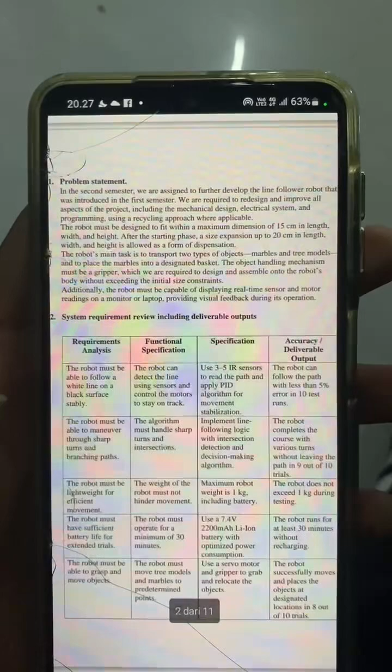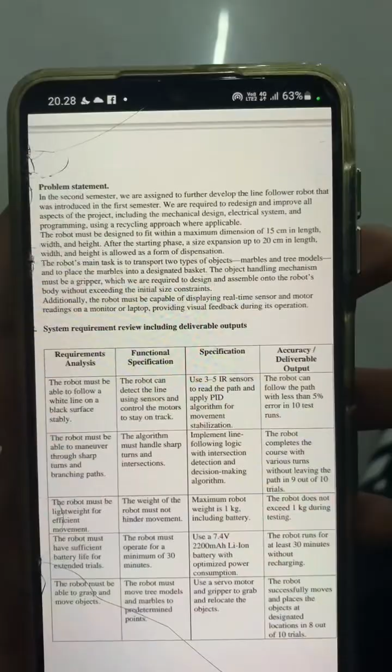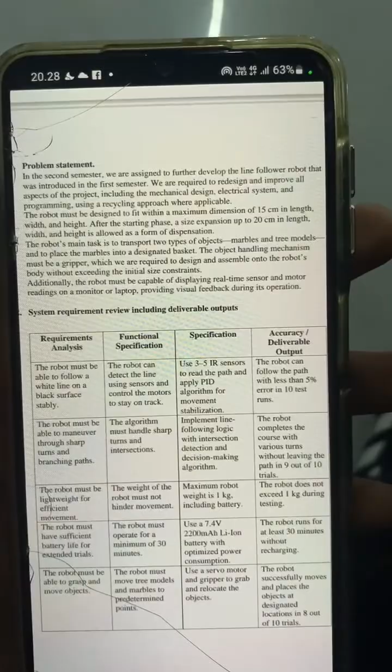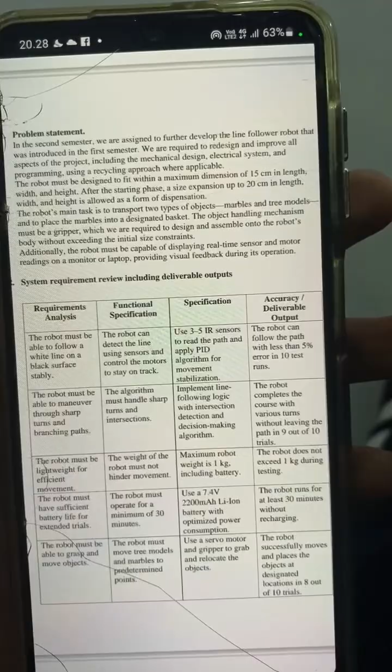Number one, problem statement. In the second semester, we are asked to further develop the line follower robot introduced in the first semester. We are required to redesign and improve all aspects of the project, including the mechanical design, electrical system, and programming, using a recycling approach where applicable. The robot must be designed to fit within a maximum dimension of 15 centimeters in length, width, and height.

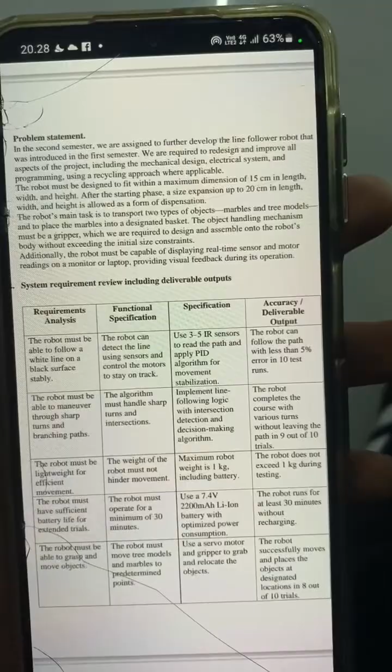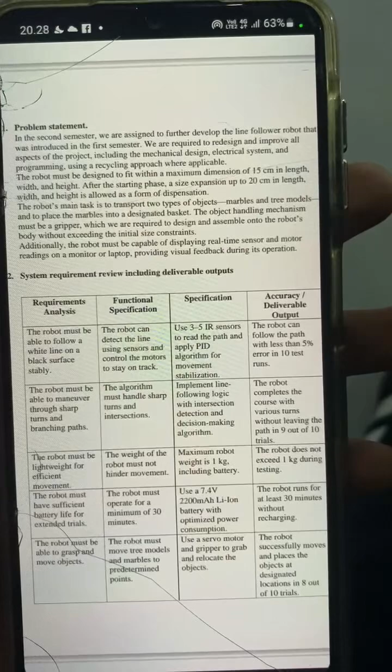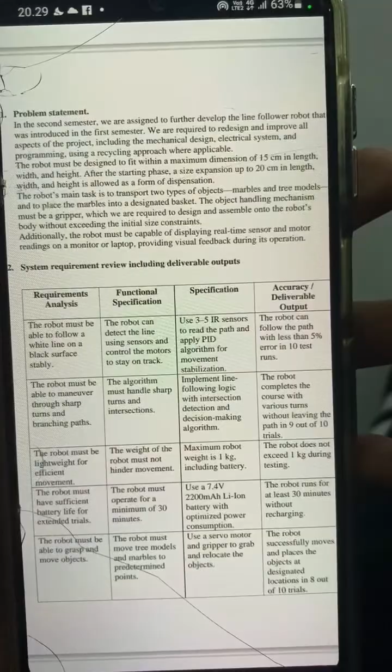After the starting phase, a size expansion up to 20 centimeters in length, width, and height is allowed for the expansion phase. The robot's main task is to transport two types of objects, marbles and tree models, and to place the marbles into a designated basket. The object handling mechanism must include a gripper, which requires design assembly onto the robot body without exceeding the initial size constraints.

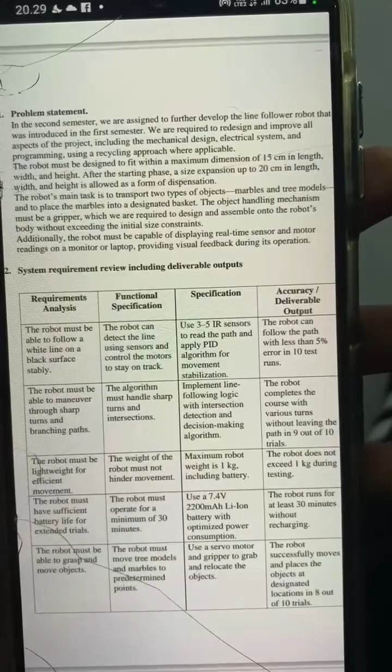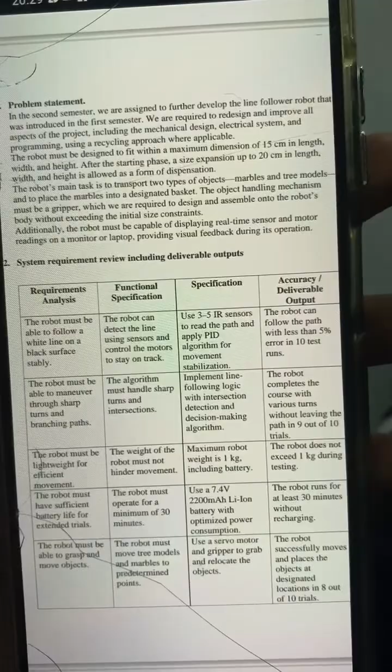Additionally, the robot must be capable of displaying real-time sensor and motor readings on a monitor or laptop, providing visual feedback during its operation. Number two, system requirement review, including deliverable output.

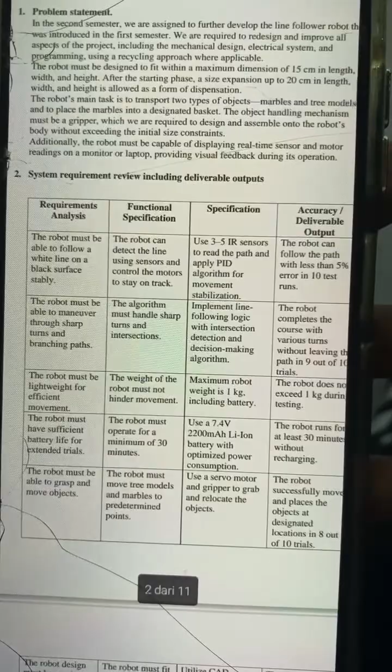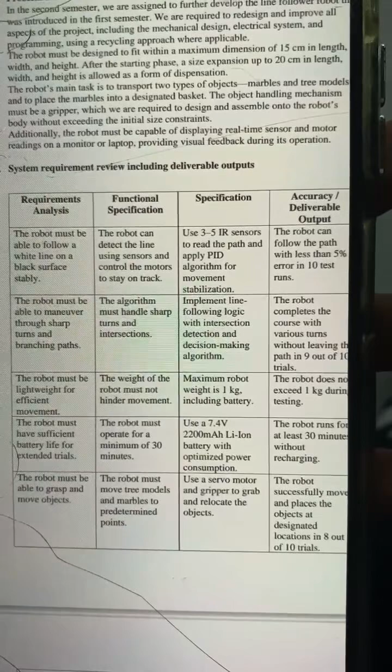Deliverable output and requirements analysis. The robot must be able to follow a white line on a black surface stably, and functional specification.

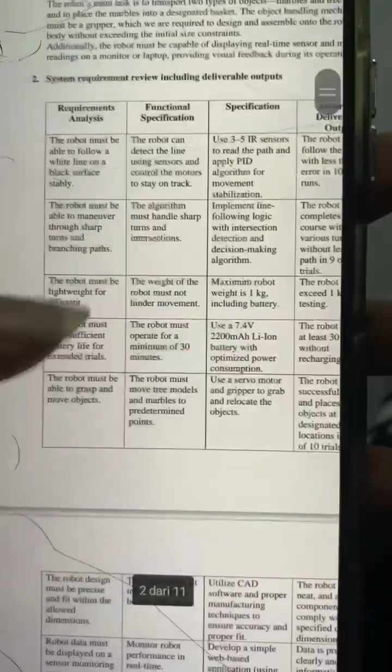Deliverable output. Sorry, too long. Thank you.

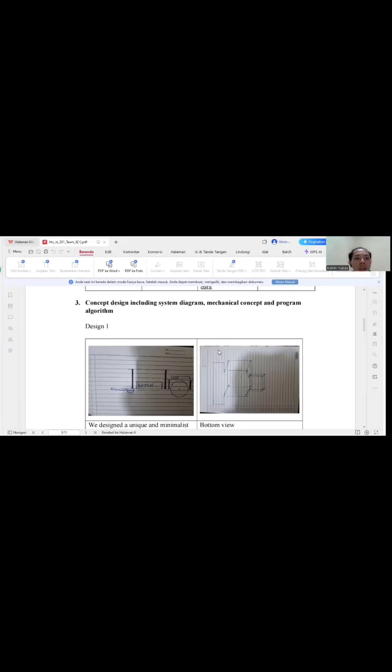Design 1. We designed a unique and minimalist structure to ensure the robot operates at maximum efficiency.

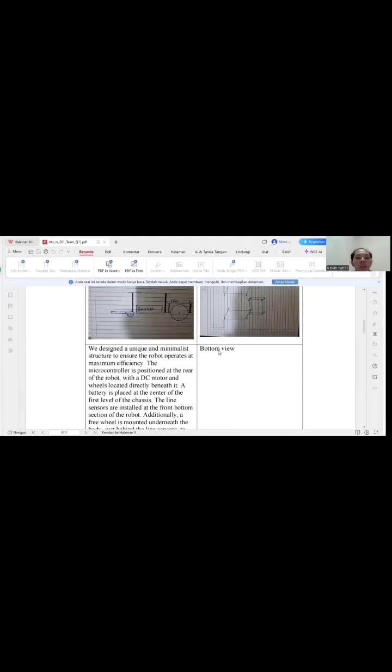The microcontroller is positioned at the rear of the robot, with the DC motor and wheels located directly beneath it. A battery is placed at the center of the first level of the chassis.

The line sensors are installed at the front bottom section of the robot, angled diagonally. A free wheel is mounted underneath the body, positioned near the line sensor to facilitate motor turning movement.

Bottom view. This design is intentionally made to simplify the mechanical process of cutting and assembly.

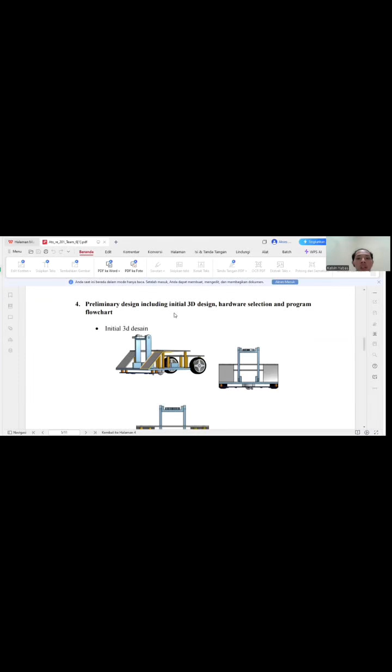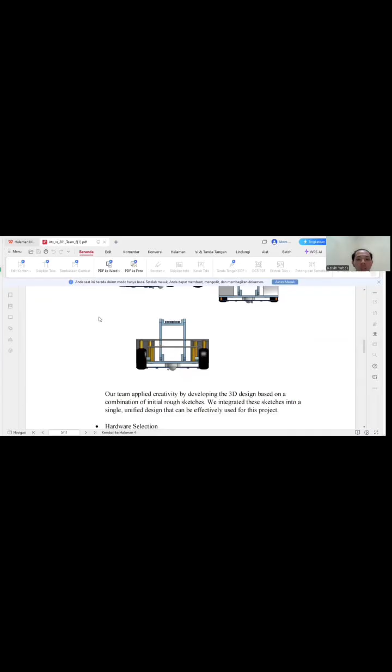Number four, preliminary design, including initial 3D design, hardware selection, and program flowchart. Our team applied creativity in developing the 3D design based on a combination of initial rough sketches.

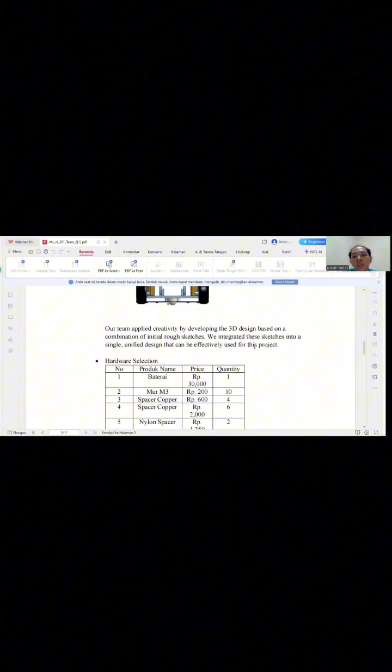We integrated the sketches into a single unified design that can be effectively used for the project. Hardware selection.

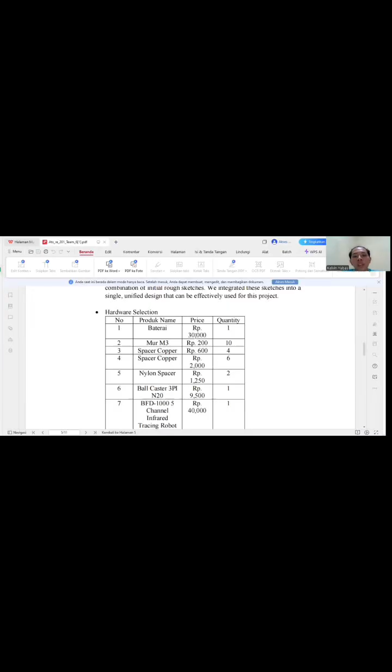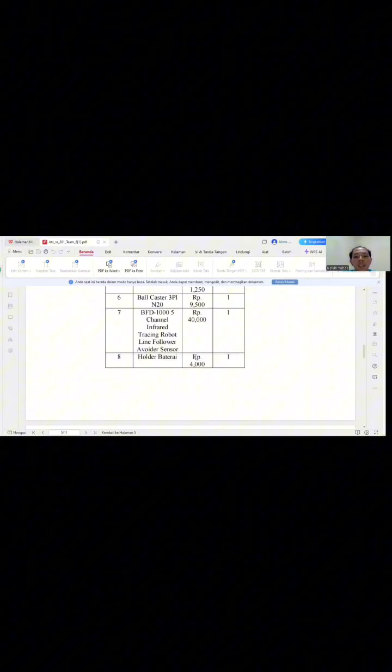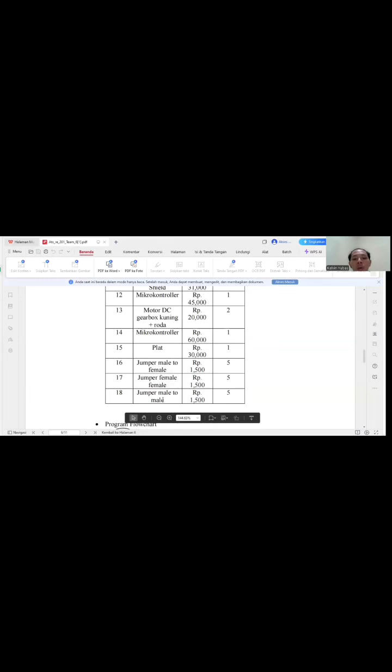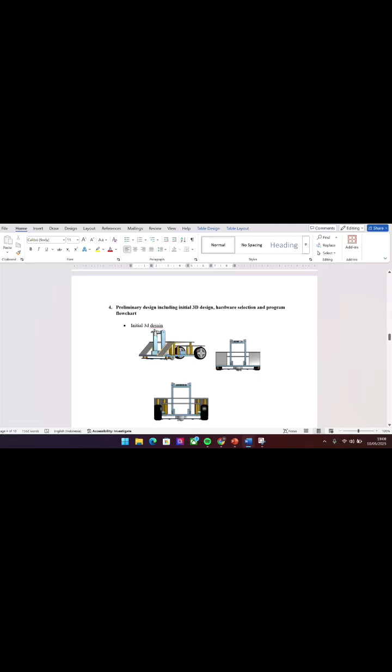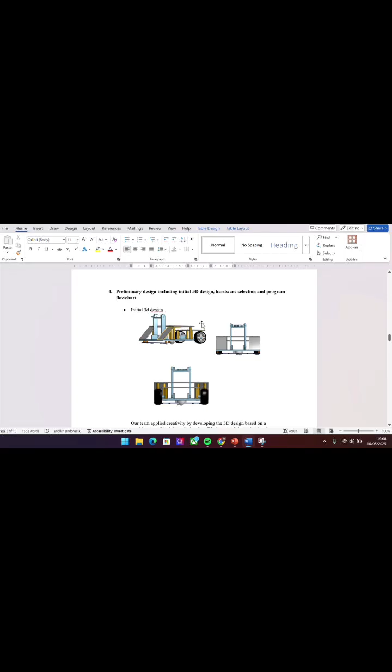Number four, preliminary design, including initial 3D design, hardware selection, and program flowchart. In this preliminary design, the initial 3D design is as follows: the first floor contains the microcontroller and motor driver, with the wheel at the back view, and the DC motor.

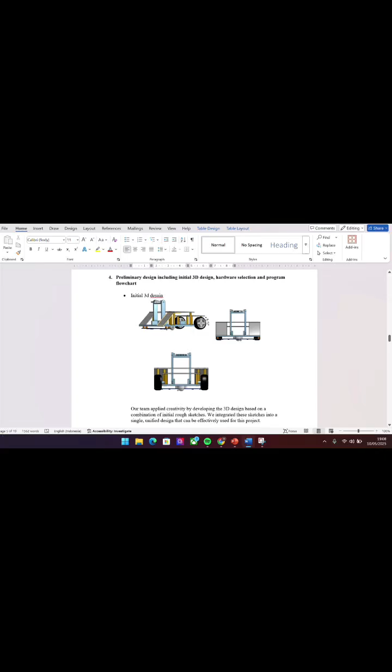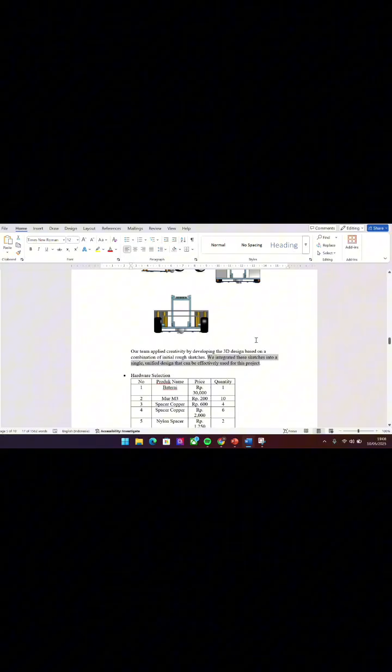Our team applied creativity by developing the 3D design based on a combination of initial rough sketches, and we integrated these sketches into a single unified design that can be effectively used for this project.

Hardware selection, numbered from 1 to 18, as shown.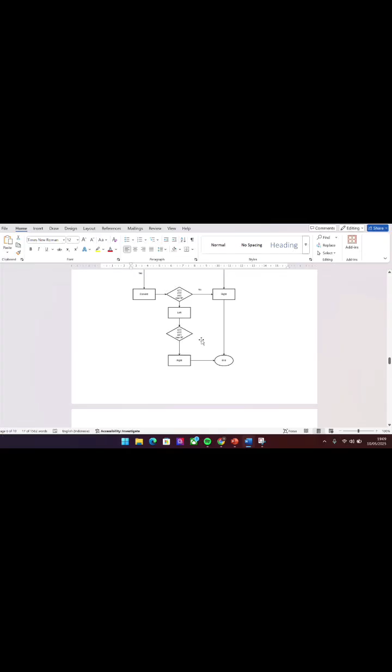Number 5, critical design includes final 3D model, confirm hardware selection, and software algorithm.

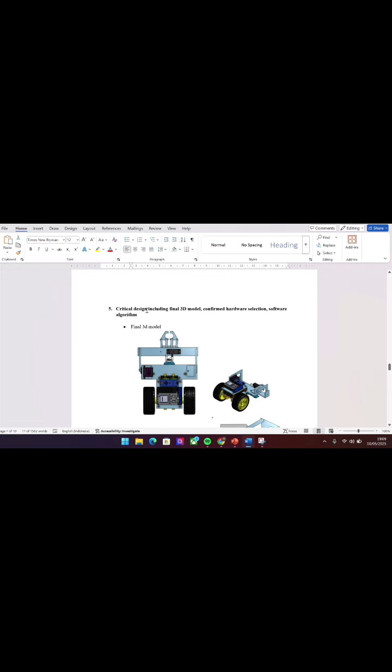The final 3D model, you can see by concept this, and the top view, and the isometric view.

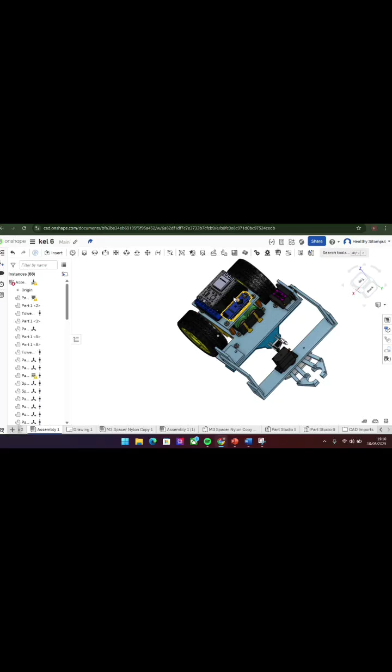In the first floor there is battery and holder battery, servo, and on the second floor there is microcontroller and driver motor. On the bottom side there is DC motor yellow and wheel yellow, freewheel, line sensor, and gripper.

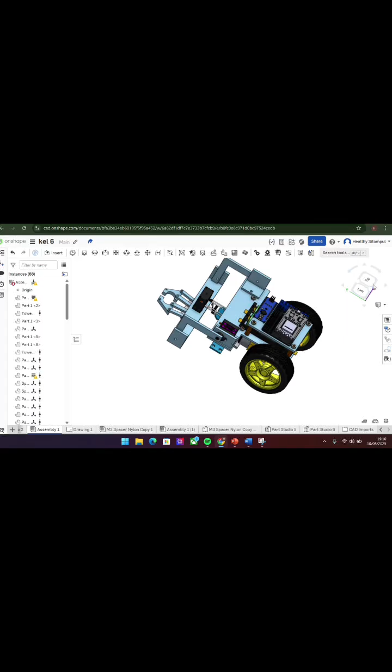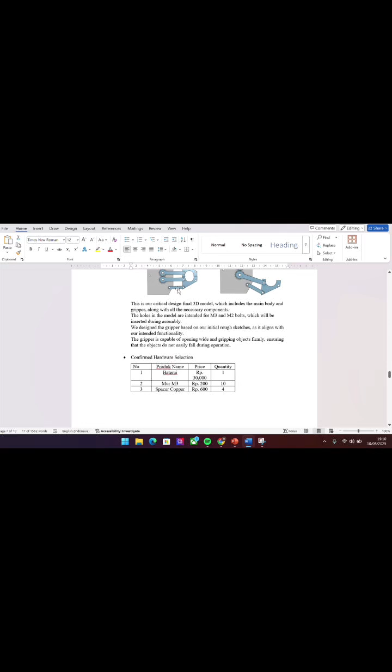You can see the mechanism of my gripper. Okay, thank you. Next to this is our critical design final 3D model, which includes the main body and gripper along with all the necessary components.

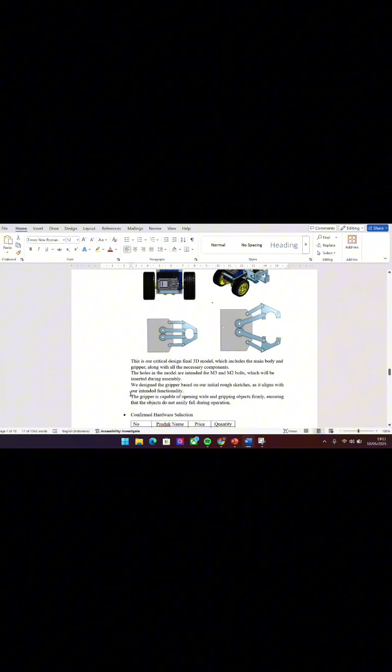The holes in the model are intended for M3 and M2 bolts which will be inserted during assembly. We designed the gripper based on our initial rough sketch as it aligns with our intended functionality. The gripper is capable of opening wide and gripping objects firmly, ensuring that the object does not easily fall during operation.

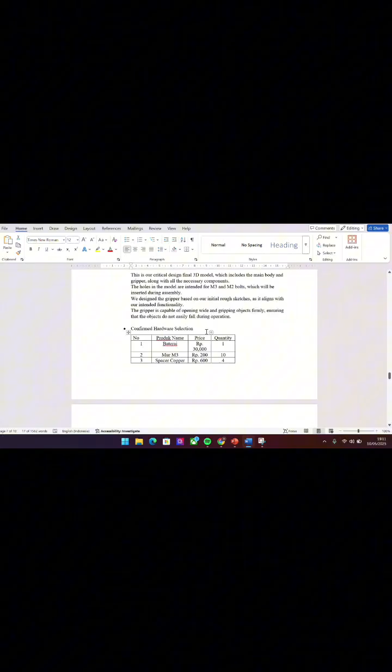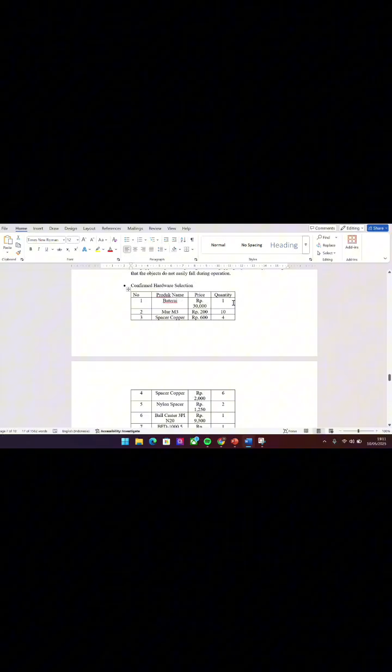Confirm hardware selection. I will read for you, and you can see my table. Number one, battery quantity 1; two, bolt M3 quantity 10; three, spacer copper quantity 4, spacer copper quantity 6, nylon spacer quantity 2.

Caster wheel or freewheel quantity 1, line sensor quantity 1, holder battery quantity 1, servo quantity 2, bolt M3 quantity 20, motor driver shield or NodeMCU quantity 1, ESP8266 quantity 1, DC motor yellow and wheel quantity 2, Arduino Nano quantity 1, acrylic flat quantity 1.

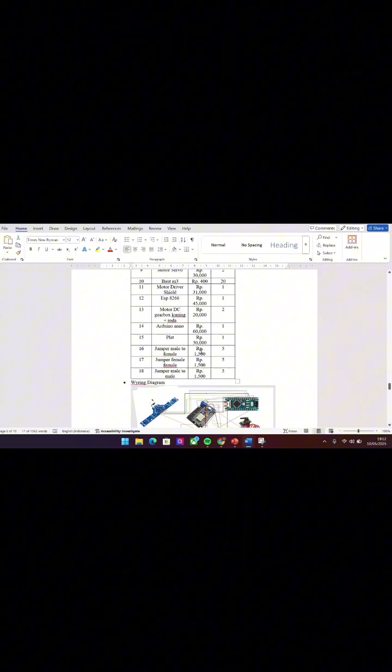Jumper male to female quantity 5, jumper female to female quantity 5, jumper male to male quantity 5.

Next, the wiring diagram. My team used two microcontrollers: a Nano and an ESP8266. You can see the jumper connections.

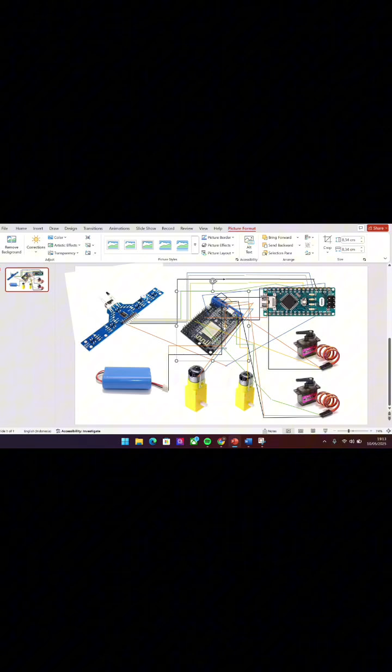Why did my team use the Nano? Because the ESP8266 lacked enough pins for the servo, so we jumpered the servo connection between the ESP8266 and Nano. My team used RX/TX on the ESP to jumper to the Nano.

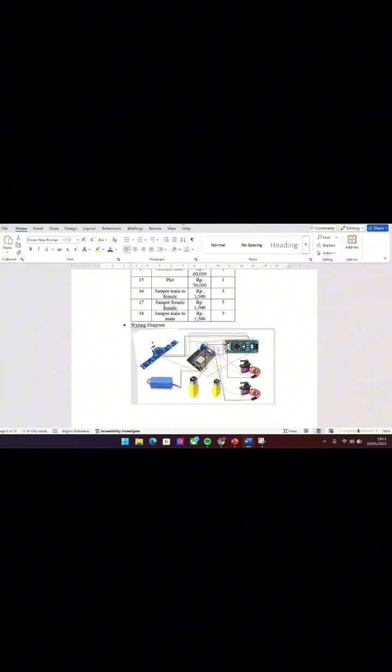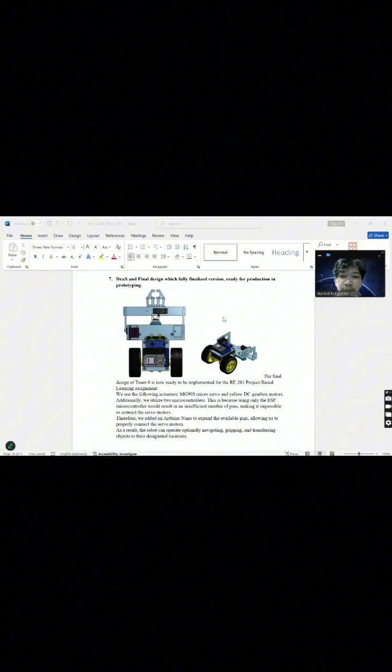Okay, here I will explain about the draft and final design and project timeline. Number 7, draft and final design, with the fully final version ready for production or prototyping.

The final design of Team 6 is now ready to be implemented for the RE 201 Project-Based Learning assignment. We used the following actuators: MG90S micro servo and yellow DC gearbox motors.

Additionally, we used two microcontrollers. This is because using only the ESP microcontroller would result in an insufficient number of pins, making it impossible to connect the servo motors. So we added an Arduino Nano to expand the available pins, allowing us to properly connect the servo motors.

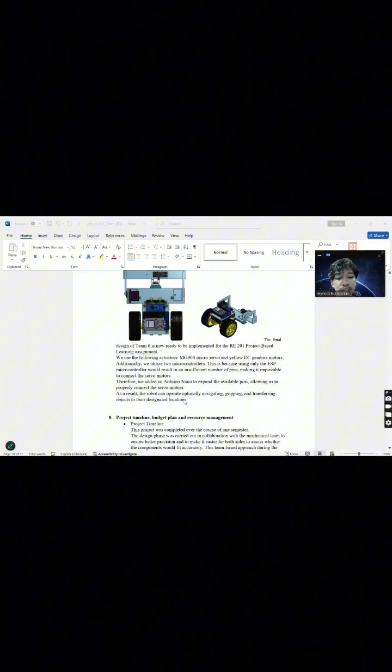As a result, the robot can operate optimally, navigating, gripping, and transferring objects to their designated locations. Next, number 8: project timeline, budget plan, and resource management.

Project timeline: this project was completed over the course of one semester. The design phase was carried out in collaboration with the mechanical team to ensure better precision and to make it easier for both sides to assess whether the components would fit accurately. This team-based approach during the design stage greatly facilitated the process.

The electrical phase was conducted alongside the programming phase, allowing both teams to work together efficiently. This collaboration helped identify which components were connected to each pin, enabling the programmer to map and code the pins correctly. As a result, the overall process became more streamlined and time efficient.

Next, budget plan. A challenge given to second semester robotic engineering students in the RE 201 course requires each team to limit their total component expenses to a maximum of IDR 400,000.